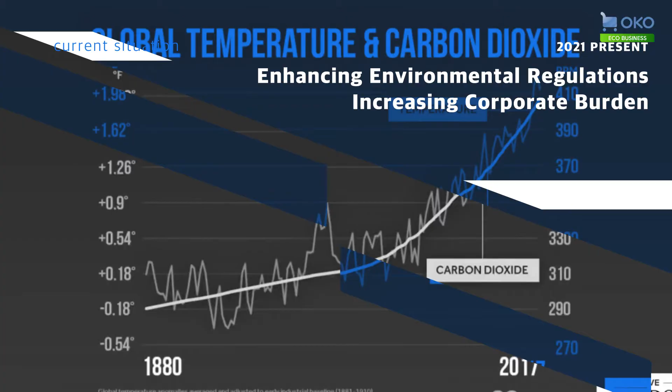The changes that OKO Eco Business will make in line with this situation suggest not only improving efficiency, but bringing new alternatives to lessen the huge amount of carbon emissions from the logistics process. This is the logistic innovation that OKO's unpowered and eco-friendly product will bring.

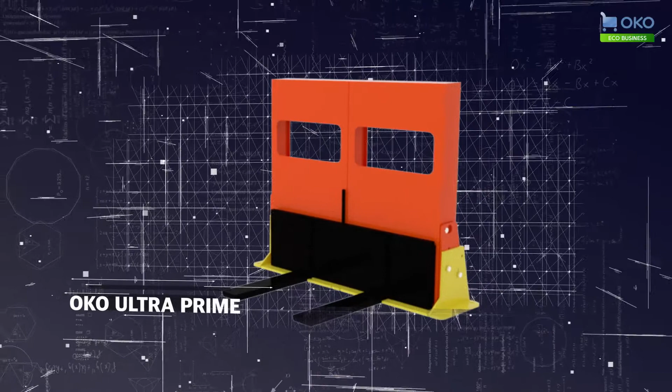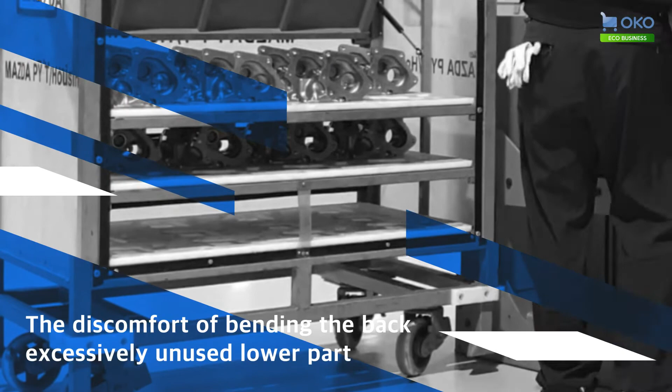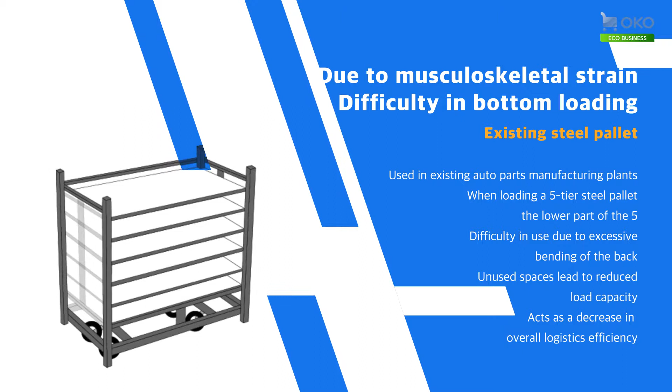In every process of logistics, OKO's Ultra Prime increases load capacity with decreased number of shipments, reduced carbon emissions, and costs. The 5-leveled steel pallet used in existing auto components manufacturing plants was not used due to excessive waist bending when carrying from the 2 lower stages of the steel pallet. These unused levels resulted in reduced load capacity, which caused the entire logistic process to lessen its efficiency.

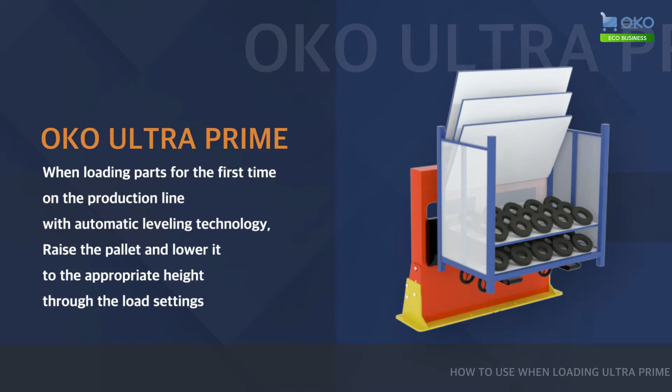OKO's Ultra Prime provides a highly efficient logistics system by focusing on these facts. Through automatic adjusting skill, when the production line loads components primarily, insert the steel pallet into the Ultra Prime fork to raise the height of the pallet, then adjust it by lowering it through load setting.

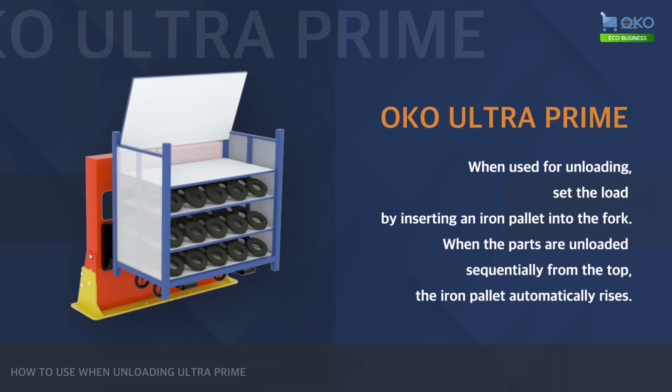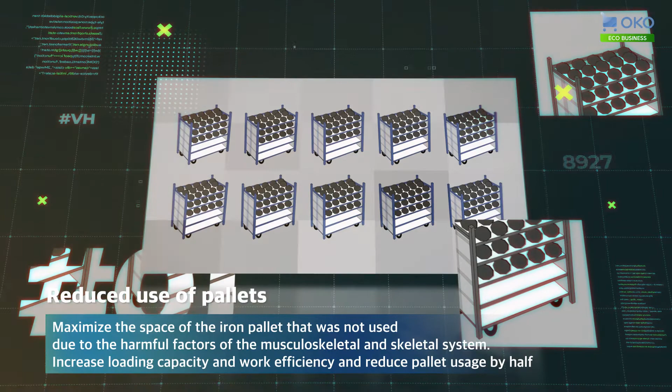Conversely, when used for unloading, the steel pallet will automatically be raised by inserting it into a fork for load setting, then unload the components from top to bottom. This increases load capacity and work efficiency, and reduces use of pallets to half, as it maximizes the space of the steel pallet which had not been used due to the risk of musculoskeletal damage.

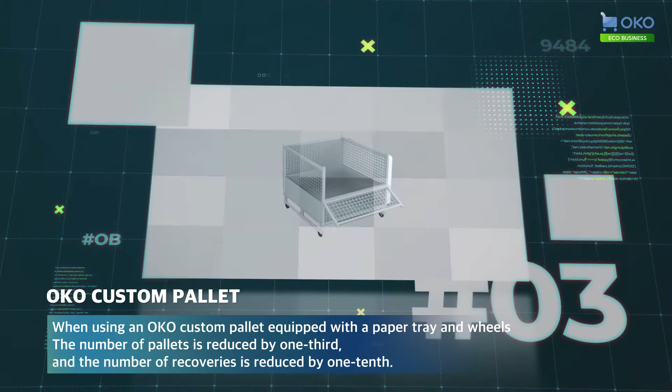In addition, wheels can be installed, and the use of the OKO custom pallet with stationary storage attached will reduce the number of pallets by 1/3, and the number of shipments will be reduced by 1/10.

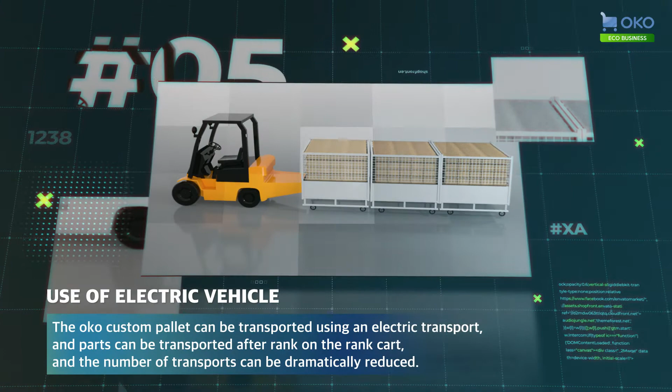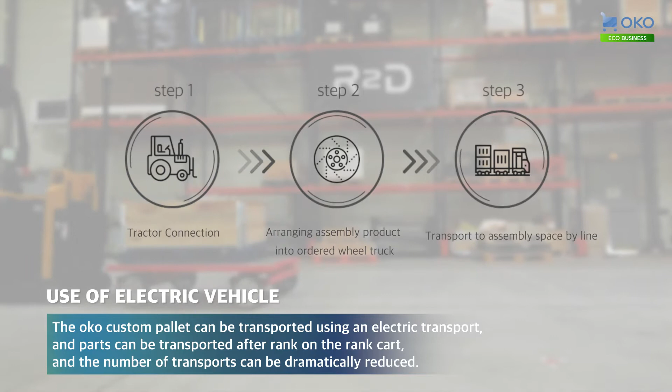In particular, the OKO custom pallet can be connected to a tractor to move large quantities of items in various ways. By using electric transport cars and tractors, the process of arranging parts can be easily incorporated into the assembly line, effortlessly transporting and decreasing the number of shipments.

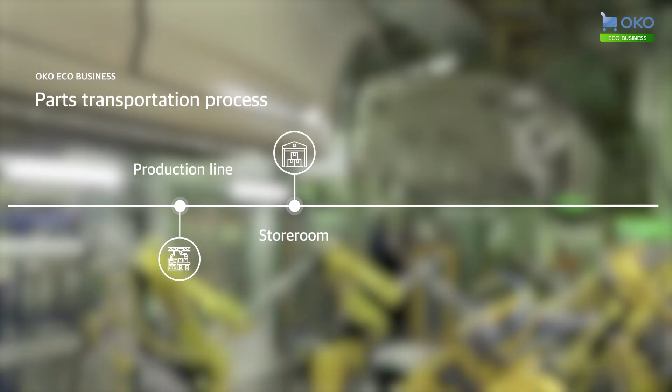OKO Eco Business's product is stackable up to a 3rd level, while the original steel pallet is stackable only to a 2nd level, throughout the component's transportation process from empty pallet storage, production lines, material storage, logistics hub, to the vehicle assembly plant. It also reduces the number of products to be used, area for storage, and number of transportations by 1/3, making components stackable twice the original per product.

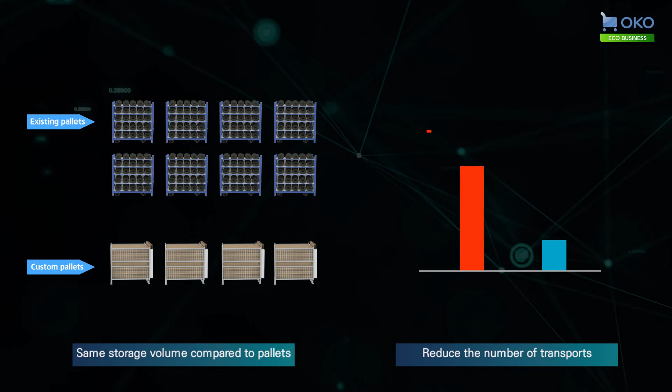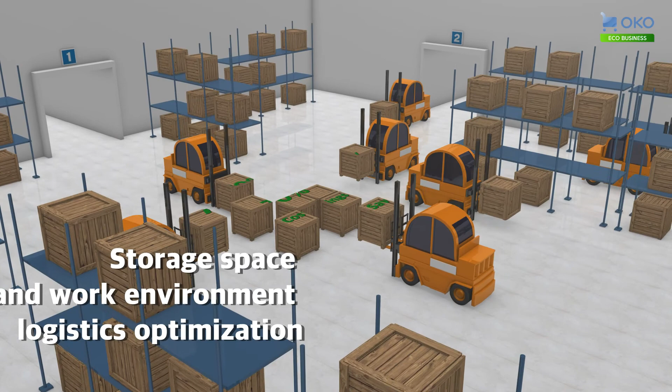This begins the revolution of the components factory and assembly factory. The significantly reduced number of shipments results in a 67% reduction compared to existing carbon emissions through logistics, and also a 70% cost reduction due to optimization of storage space, working environment, and logistics. It is the generation calling for a revolution.